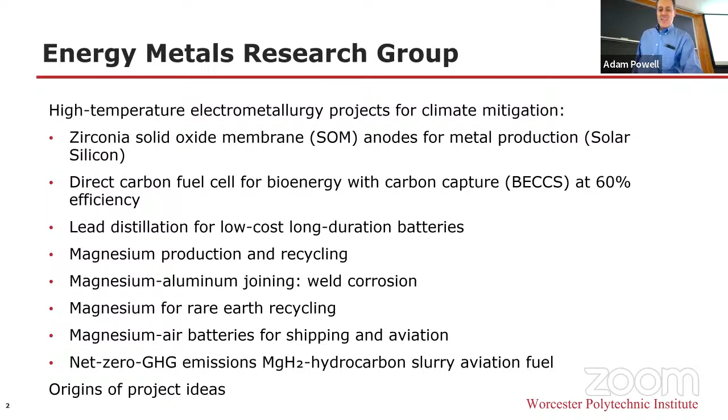It occurred to me as he presented it in the seminar a couple of weeks back that that's what we've been trying to do in our research group. So I'll talk about how the different influences in my life come together in our research group to create these different projects. To begin with, begin with a dedication.

Second is Uday Pal, who we will hear from in the spring. He became my PhD advisor after Professor Szekely passed away, and he has been a mentor ever since. His invention of the zirconia solid oxide membrane anode is part of our current research, as well as the signature technology of my startup company, Infinium.

So Donald Sadoway, we heard from recently. He also is a pioneering electrometallurgist, so I get many methods and ideas from the way that he's done research. I took graduate electrochemistry from him. He was on my thesis committee and has been a mentor since.

And finally, Tom Eager. Tom was the first person I met out of this group, in sophomore thermodynamics. He kept in touch over the years, and when I was founding a startup company, a co-founder and I came to him to ask a technical question, and we had lunch with him. He brought a check. He said, 'Here, I want to invest in your company.' I said, 'Wait a minute, we don't have a mechanism for doing that, but we'll figure it out.'

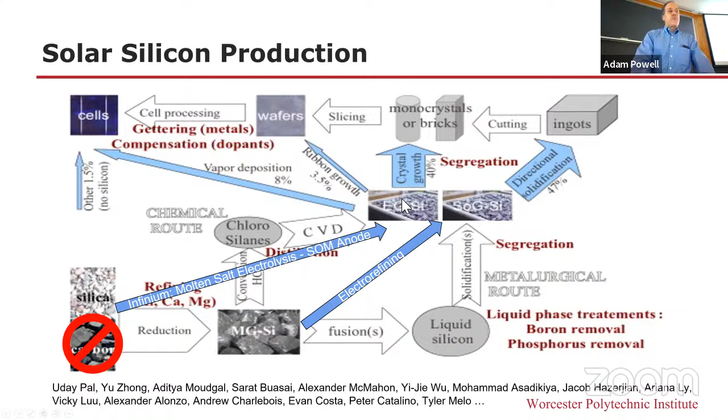The imperative to this is that silicon is a relatively small fraction of the cost, about 15% for the last 20 years. However, if we're going to continue to drive down the cost of solar energy to 18 cents, 15 cents, 10 cents and beyond, our current 4 cents per watt won't do it. And there's really no more room to reduce the cost of Siemens processed silicon.

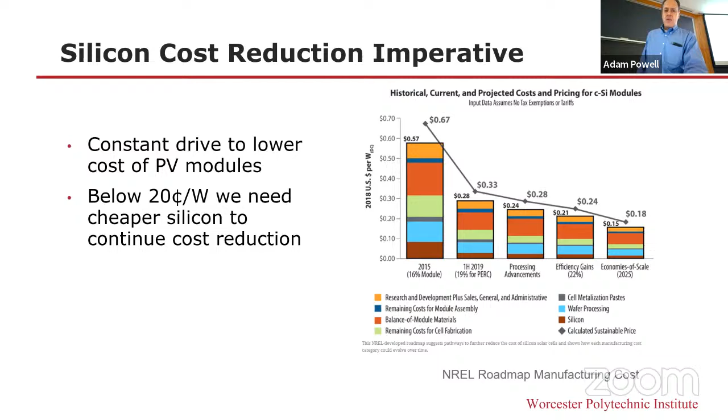So the idea is to dissolve silicon dioxide in a molten salt bath. In particular, the work of Uday Pal over the last 12 years or so has led to a new molten salt bath chemistry that was an order of magnitude better than everything else in 4 key metrics: solubility, conductivity, viscosity, and volatility. This allows you to dissolve silicon dioxide and use a zirconia, yttria stabilized zirconia solid oxide membrane anode.

This electrochemically pulls the oxygen from our molten salt electrolyte through a solid zirconia electrolyte into an inert anode, where it becomes oxygen gas. At the silicon side, we reduce—it's not really Si4 plus, it's more like an SiO4 4 minus, but it's silicon in the oxidation state of 4—gets reduced to silicon, which at this temperature is actually a decent conductor of electricity.

And we suppress dendrites by periodically switching one or more of the cathodes to an anodic state. So instead of depositing silicon, we're dissolving it away from the surface. This is a process I've been working on for quite a while. The big payoff is the energy reduction, 90% versus the Siemens process, let alone the much greater simplicity—a single step, or maybe 2 steps, from raw silica out of the ground to a usable silicon product.

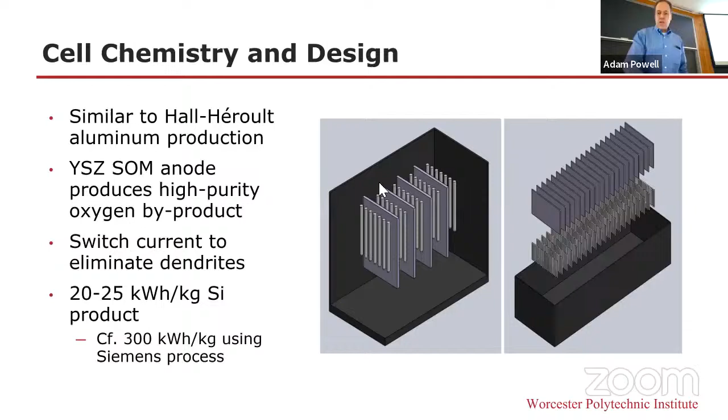This is what it would look like scaled up, making silicon slabs with the zirconia tubes, and a larger high current cell would look something like this. This is the energy balance, the thermal energy in versus the voltage stack energy.

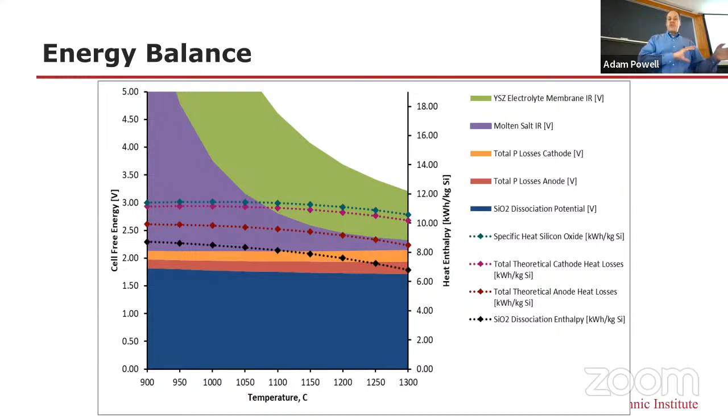Two different kinds of energy: the free energy and the thermal energy used to reduce the silica. A techno-economic model shows $1.74 per kilogram operating cost. This is considerably lower in operating costs and capital costs, but nonetheless a very high cost for a plant—so a big barrier to entry, but significantly lower than the lowest cost today of about $8 to $10 per kilogram, and as I said, with very little prospect of getting it lower because of the fundamentals of energy costs.

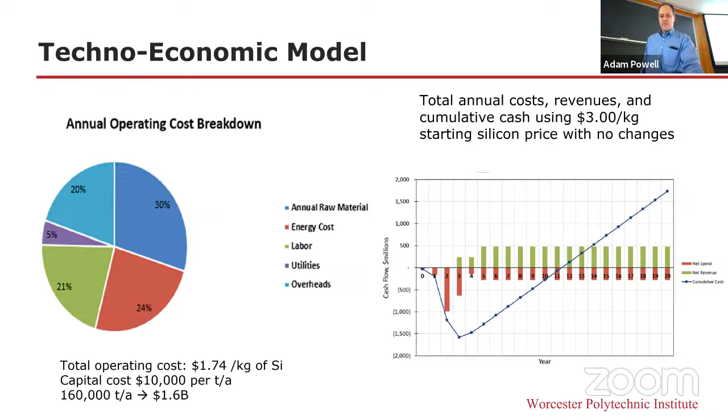Next project to talk about is the direct carbon fuel cell. The goal of this is that bioenergy with carbon capture, utilization and storage, has been a necessary part of all of the Intergovernmental Panel on Climate Change scenarios. But it's very inefficient, because you have to first take your biofuel and your air...

You have to do air separation and some gasification in order to feed it into a fuel cell, with an overall flow sheet of some 10 or 15 different unit operations, and an efficiency around 30 to 35%.

So about 8 years ago, Boyd Davis from Kingston Process Metallurgy came to me and said, 'Hey Adam, I have this idea. The coal industry is struggling with their emissions. What if we could just dissolve coal in liquid iron and then use a solid electrolyte and make electric power that way, just using air on the other side of the electrolyte?' So we took this idea.

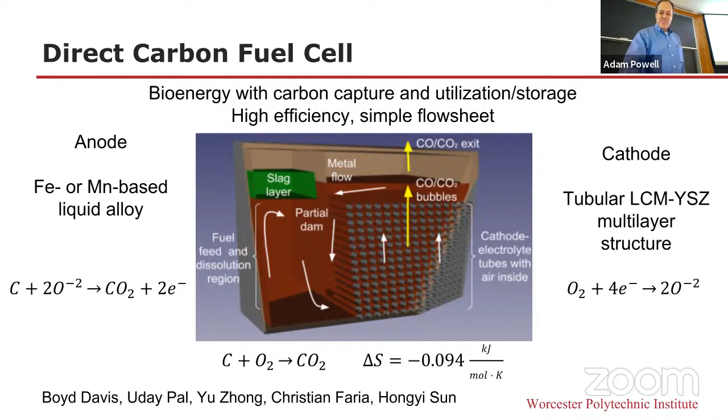We wrote a couple of proposals, neither of which succeeded. But then, while I was at Infinium, I came here and picked it up, working with Uday Pal and Yu Zhong. Christian Faria, a master's student, ran with it, as did Hongyi Sun -- and then Stephen Jasek, the second master's student.

Stephen Jasek was able to produce an electrode structure with just a 40 micron zirconia layer, finally able to realize some of the performance.

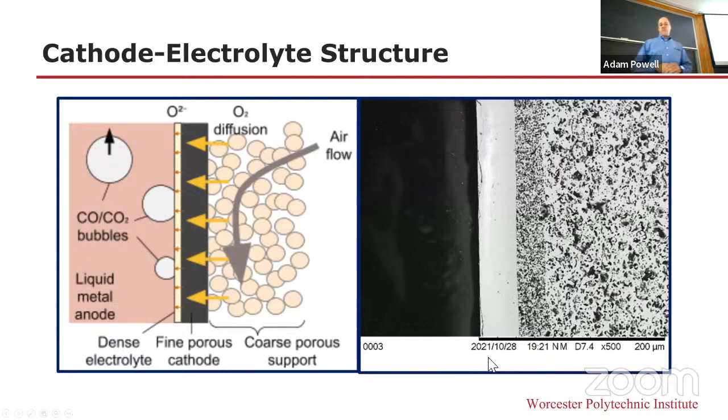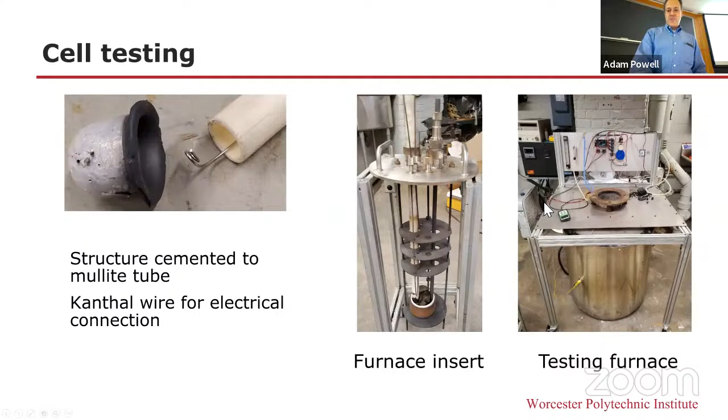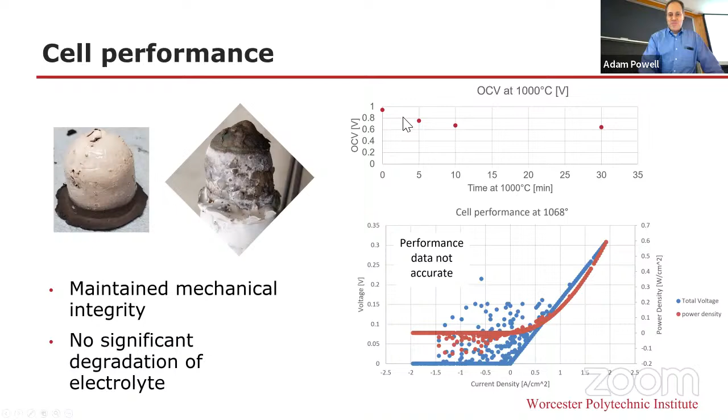He was able to measure an open circuit voltage starting at 1 volt, which declines slightly over time, maintaining mechanical integrity with no significant degradation of the electrolyte. We were not able to measure the current accurately, unfortunately, and then he finished -- we'll just leave it at that. But the open circuit voltage he measured is very close to the theoretical open circuit voltage.

Carbon is one of those things where for C plus O2 to CO2, the entropy is very close to zero, so the free energy and enthalpy are very close to each other. So we get a voltage versus current density prediction that looks like this: it declines as you increase current density because the resistance losses are proportional to current density. So you start from your theoretical value and decline from there.

With the final efficiency around 60%, this is around twice the efficiency of integrated gasification designs, whether with combined cycle or a fuel cell -- so quite a bit more efficient. Being able to demonstrate the high open circuit voltage indicates that we should be able to get that from this process. So this is an ongoing project.

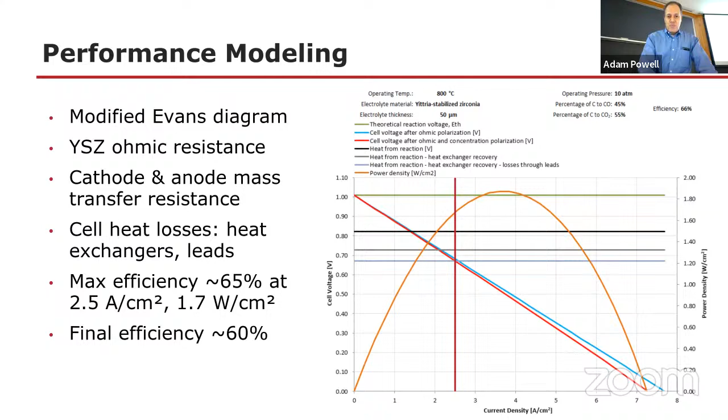The operating cost is quite a bit lower as a function of the efficiency, and the capital cost as well, because we have just basically two unit operations here. We take biochar, or charcoal, that's produced just by pyrolyzing your biofuel, your biomass. You can't really put that into any other fuel cell -- it's just carbon.

We think that we can use a lot less thermal energy per kilowatt hour of delivered energy because of that high efficiency. So this is an exciting project -- still in progress -- but again, it came from a collaborator.

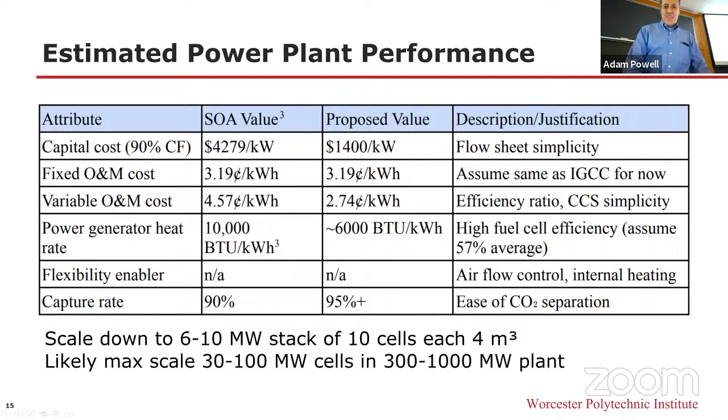The next several projects deal with magnesium and magnesium metal in particular. Why magnesium? Because it's very energy dense -- theoretical energy density of 7 kilowatt hours per kilogram, comparable to coal, but higher in kilowatt hours per unit volume than any of the fossil fuels, much better than ammonia and others we'll come back to later.

It's also very abundant. The oceans have 2 quadrillion tons, enough for 300,000 tons per human on the planet. If we took just one millionth of what's in the oceans, that's 300 kilograms per person -- enough energy to deliver one month's worth of electricity consumption for the average US citizen, that's household, industrial, commercial, everything. It also has very low toxicity.

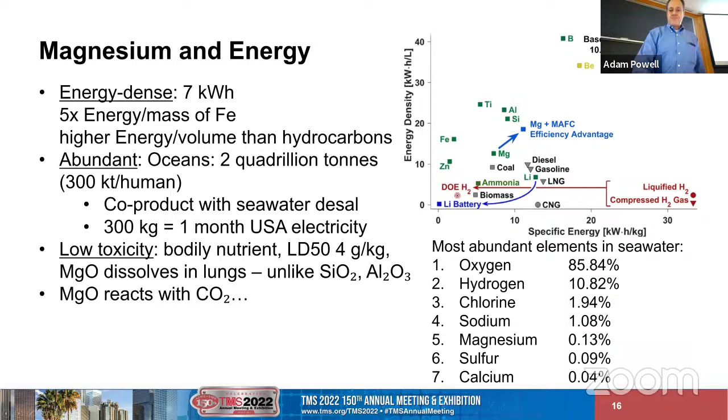We drink magnesium hydroxide for upset stomach, and we dump hundreds of tons of it per year on our roads to melt ice. And it reacts with CO2. I'll get back to that last point in a moment.

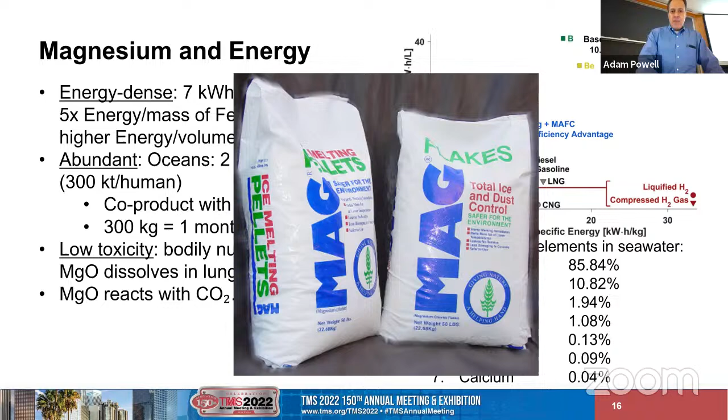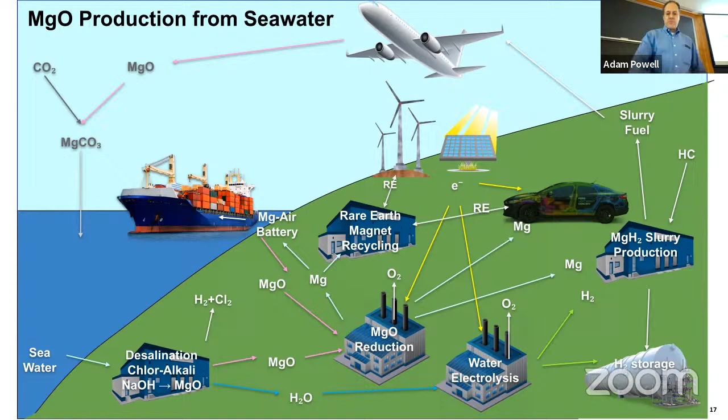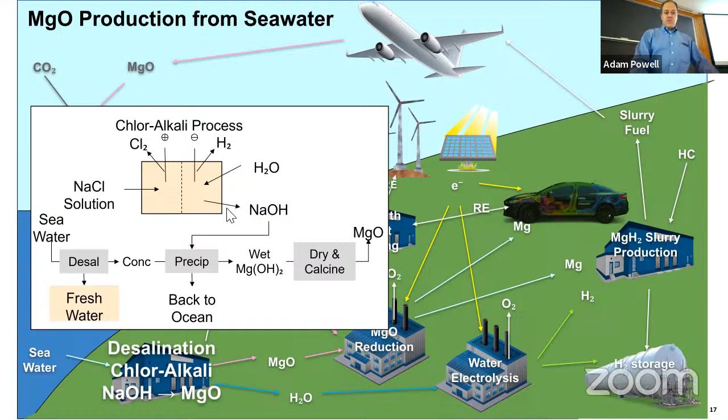First, we'll talk about what's called the magnesium clean energy ecosystem vision, and it begins with production from seawater. Every seawater desalination plant in the world that produces fresh water also has a concentrate byproduct that's mostly sodium, but the next most abundant cation is magnesium. A simple pH shift using, for example, sodium hydroxide from a chloralkali cell precipitates magnesium hydroxide, which you can dry and calcine. So with electricity and in principle zero direct emissions, you can go from this waste product to magnesium oxide.

You can then take that magnesium oxide and reduce it to metal through a process that's been influenced by Uday Pal, who began well before Infinium, looking at the use of a solid oxide membrane to make magnesium. The next important piece came from David Dussault, who was my first master's student when I was on the faculty at MIT. After leaving MIT, he developed this process for vapor compression distillation of water.

He got it to very similar efficiency to membrane separation of water, whether it's brackish water or seawater. That was the inspiration for this: what if we could do vapor compression distillation of magnesium? Well, what we could do then is use what's called a reactive metal cathode, starting with something like tin, and that enables us to do molten salt electrolysis in the same way that aluminum is made today.

This enables it because once we've reduced a bunch of magnesium oxide to metal, we basically take 90-10 tin-magnesium, increase the magnesium content, and produce oxygen gas, then put it into this distiller and get out pure magnesium metal, and tin with a little bit of magnesium left in it. So we get the pure magnesium metal out of that. This is the work of many undergraduate students, and now Zujian Tang has joined our group as a PhD student to work on this process.

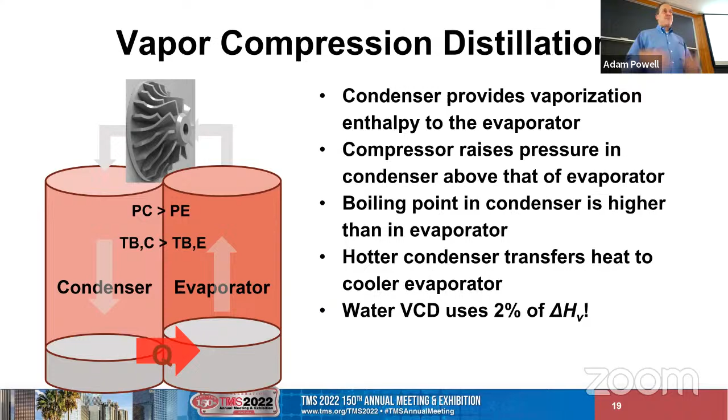David Dussault was able to demonstrate this for a water system with input energy that's only 2% of the vaporization enthalpy of water - the other 98% of the energy comes from the condenser. A really impressive system. So that was the motivation, the inspiration for doing this with magnesium.

It turned out compressing magnesium vapor is really hard, but the next best thing is something called a multiple effect thermal system distiller, and we came up with something called a gravity-driven multiple effect thermal system. This is what that looks like for a 100 kilogram per hour distiller.

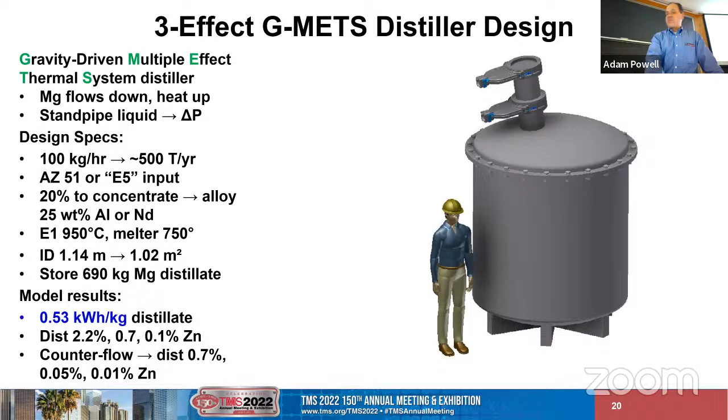On the inside, we feed scrap or our magnesium-tin alloy, and it flows from the melter to the first evaporator, where some of it evaporates and condenses up here, and what remains flows down to the second evaporator, where some of it evaporates and condenses. What remains flows down to the final evaporator, where some of it evaporates and condenses, and the remainder flows down to the concentrate accumulator.

We end up starting with something that's 50-50 by weight magnesium-tin, which is about 85-15 by mole, with more magnesium moles because of its molar mass, and we end up with something that's 90% tin by mass coming into the concentrate.

The energy from condensation provides the energy needed to evaporate in the next effect, and this energy from condensation here provides the energy needed to evaporate in this top effect. The pressure differences are created by these standpipes - the liquid height, your rho-G-H, gives you a higher pressure in evaporator 1 than above it, a higher pressure in evaporator 2 than above that, etc.

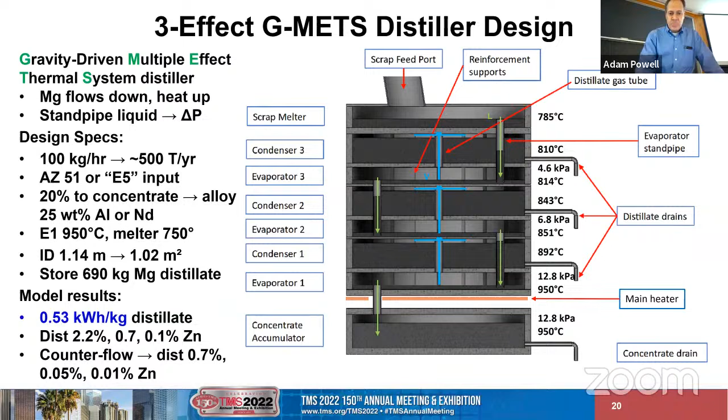The model shows this uses about one-third of the enthalpy of vaporization as the input energy. In practice, at small scale in the lab, we've been able to get 2 kWh per kilogram, which is just over the enthalpy, and about 60 to 80% less than the 5 to 7 kWh per kilogram used in industry today. So that's the basic how the technology works. You can scale it up just by making it wider, and so that's the process.

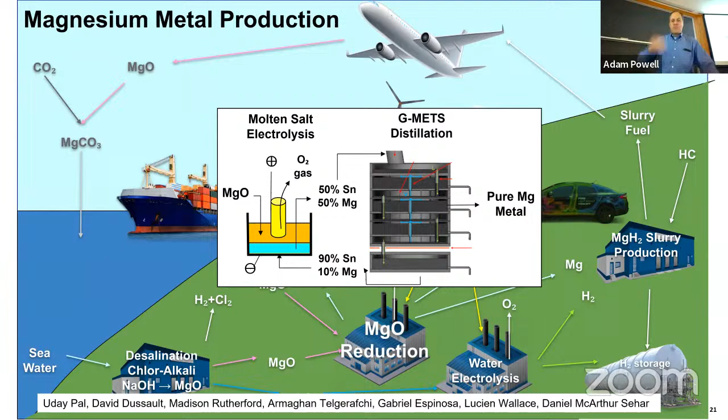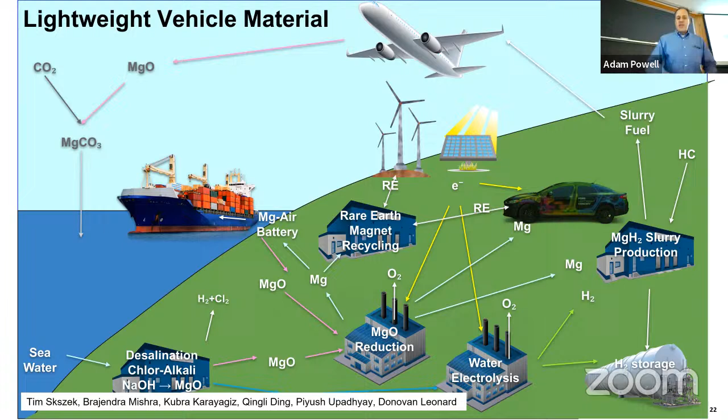Next, we can use this for many different applications. I mentioned that the metals have high performance. Magnesium has the best strength to weight and by far better stiffness to weight in parts than other metals, and is far more recyclable than composites.

So when Ford and Magna looked at what would the ideal multi-material lightweight vehicle be, they chose composites for some part of the substructure, but for the exterior and a lot of the structure, they chose magnesium because it's just much more expensive to make composites into the Class A surfaces.

The cycle time in the dies is very high. You need very large numbers of dies. It takes a half hour or more, whereas with magnesium, it's sheet stamping. It's seconds per part in a stamping die.

So one of the biggest challenges is joining and corrosion. As I was transitioning from Infinium to WPI, I talked with Tim Skszek at Magna, who said, we've got this new lightweight door that we're looking at, and instead of making it all aluminum, we want it to be aluminum magnesium. But we're concerned about corrosion at welds.

So I worked with, my next call was to Brajendra Mishra, who was a corrosion expert here. And then we put together a group, a postdoc and a grad student, and a group at Pacific Northwest National Lab and Oak Ridge National Lab. And we worked on understanding corrosion at welds.

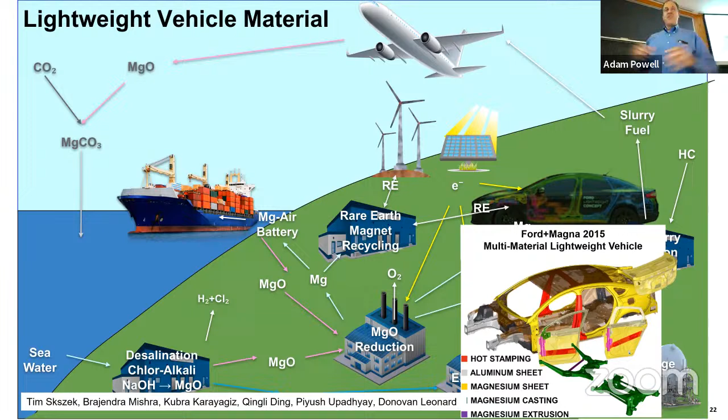So that project is wrapping up now, and we've shown that the friction stir welds have very little corrosion, and we think we understand why based on some of the structures that form and their electrical potential. We're finalizing more on that another time.

But the next project is on rare earth magnet recycling. This is something that has been around for years. A group with Toru Okabe at the University of Tokyo, another colleague, pioneered this, and Hitachi picked it up.

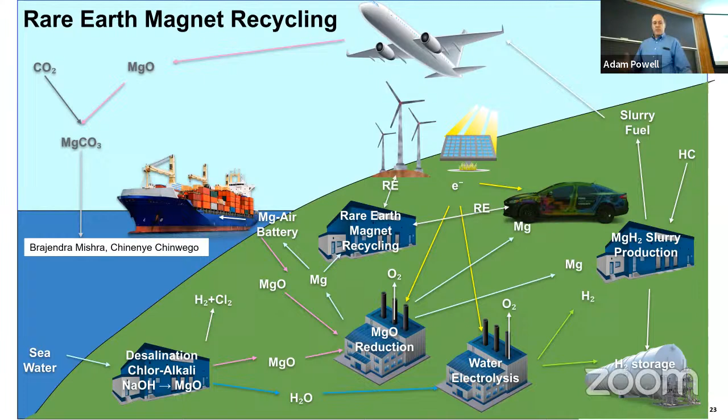But the issue here is that you can leach the rare earth metals out of rare earth magnets using liquid magnesium. However, then you have to use distillation to get the magnesium out. As I mentioned, that's a very inefficient process.

But if we use G-METS distillation, Chinenye Chinwego has shown that we can cut the energy use by about 60% and the cost by roughly in half using our distillation process. And to get the last bit of magnesium out, you have to go to vacuum distillation, but you've already removed about 80 or 85% of the magnesium much more efficiently than this conventional distillation process.

So she's in the process of starting a company and raising funds. So it's exciting. This may be the second spinoff, second to Solar Silicon.

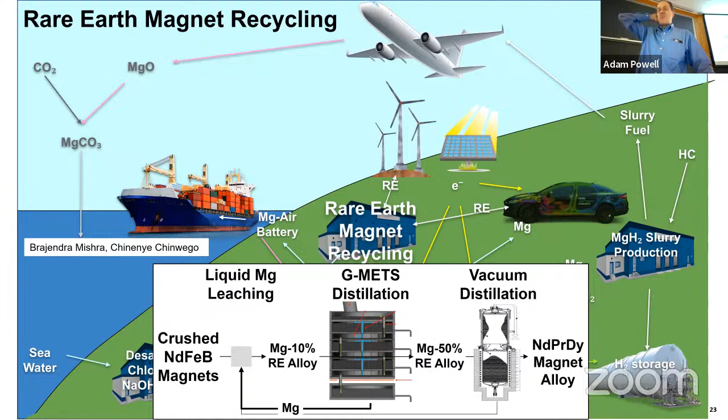Of Aditya and Mohammed Asadikia. And so next is a molten salt magnesium air battery. This is a large team. It's started by Hong Yi-sun and led now by Maya Shahabi in the group. I'd say that this is one of the two projects that really originated within the group.

The idea began with Hong Yi working with Christian Faria on the direct carbon fuel cell. And we thought, okay, what if we put some liquid magnesium on top of this, that as the CO2 came out, the magnesium would grab the oxygen and oxidize, and the carbon could go back into the liquid metal. So we'd have kind of a closed loop, carbon, CO2, back to carbon to CO2.

The magnesium would turn into magnesium oxide, and we could use its extraordinary energy density to maybe propel ships across the ocean. Well, that was a terrible idea because a lot of energy is lost in that CO2 plus magnesium to magnesium oxide plus carbon reaction. You only get about a third of the energy out of it at most.

So we went back to the drawing board and we said, okay, what about aqueous magnesium air batteries and fuel cells? Those have been around for a while. We looked at the literature and we said, this has some fundamental problems. You get an oxide film that passivates it and stops the reaction. We get hydrogen evolution. And so we're really not equipped in this group.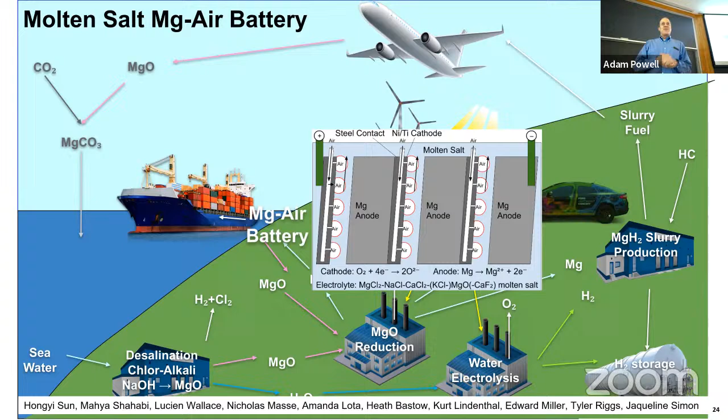And we came up with this idea, this crazy idea. You just put the magnesium, attach it to an electrode, and have an air electrode at the other side, and generate a voltage. Is that going to work? I had no idea. So we tried it, and not only did it work, but...

Skipped something, all right. Anyway, we were able to generate 1.9 volts, which is the highest voltage of a magnesium air battery to date by far. The next highest is 1.4 volts. So that was Hongyi Sun's work.

So the way it works, as I mentioned, we inject air into a porous cathode. It can be made of nickel, titanium, or stainless steel. And we found that for many hours in air with a molten salt, nickel is just fine. It doesn't oxidize, let alone dissolve.

It's pretty remarkable. As I mentioned, it generates a voltage through these combined reactions: oxygen to O2 minus, magnesium to Mg2 plus. These two dissolve in from the anode and the cathode into the molten salt. So your overall reaction is just the oxidation of magnesium to MgO.

The theoretical energy density is extraordinary. And the practical energy density is somewhere around 1,500 to 2,000 watt hours per kilogram, which is about 10 times lithium ion. Then the problem is you have to get this magnesium oxide out of the molten salt.

So a proposal for that was, let's try freezing it from one side and see if that works. And sure enough, the first time Mahya tried an experiment, it worked. We were able to see an immediate jump in the voltage due to a reduction of the magnesium oxide concentration and activity in the molten salt. So it was really exciting.

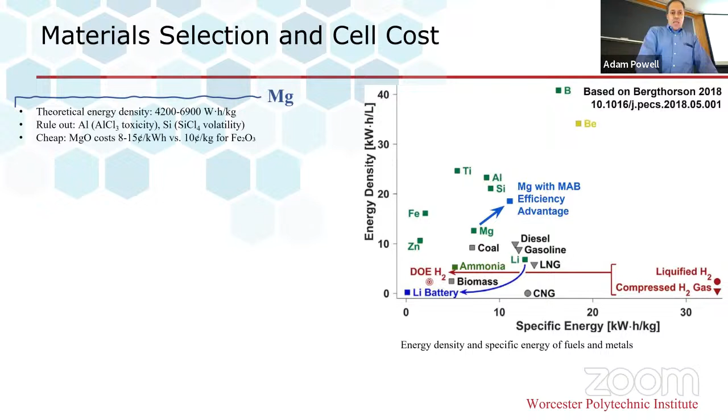Magnesium is a logical choice for these reasons. Theoretical density extraordinary. The chloride salt is basically dehydrated seawater plus carnallite, which is produced from the Dead Sea. So incredibly cheap. As mentioned, this open circuit voltage...

The cost estimates for this battery are somewhere around $3 to $5 per kilowatt hour. This is extremely low—comparable to pumped hydro, where you pump the water uphill and then capture its energy downhill. The limitations, as I mentioned, are high temperature and a low round trip efficiency.

So when you convert the magnesium oxide back to magnesium, you're putting in a certain amount of energy. You only get somewhere in the 40 to 60% of that energy back. So for round trip efficiency, lithium is much better, 90%. So if you can power something with lithium batteries, great.

But for a ship, you're only going to go a few hundred miles. If you want to go across the ocean, it's just the way to do it, I think—very low cost, very high energy density, and for potential electrification of ships and maybe aircraft.

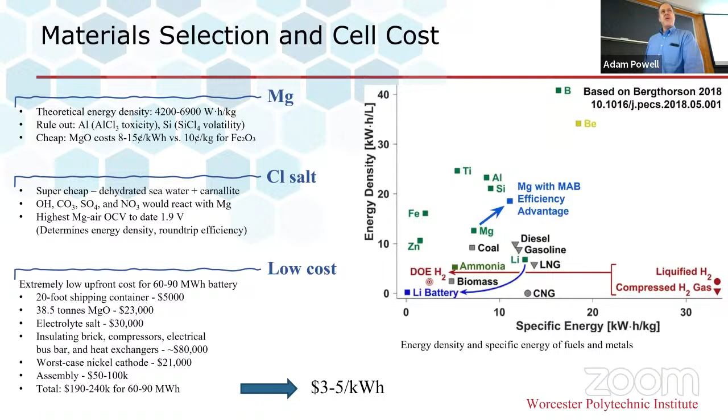If we look at the figures of merit, the round trip efficiency is considerably lower than lithium ion or Ambri, comparable to iron air of Form Energy, but with much better than ammonia, with not quite the energy density versus a tank full of a container for the ammonia tank. But ammonia is, of course, toxic and explosive, et cetera. Hydrogen as well, so much better energy density than hydrogen, better than ammonia, and very low cost as well.

Also not as high a discharge rate, but when you're trying to get across the ocean, you're talking about hundreds of hours for a discharge, maybe tens of hours for a long distance flight.

Our next step, we're working on demonstrating recharging in situ. It's an experiment this week. Well, not for recharging, but okay. Anyway...

The final project I'll talk about is a magnesium hydride zero emissions jet fuel. It's a project with Jagan Jayachandran, and this came up when Jagan and I both started in summer of 2018.

We were in new faculty orientation, and he was a combustion expert and talking about aviation. How do you clean up aviation? There are biofuels, but they displace crops and wooded areas for carbon capture by forests. They're not very efficient. Corn ethanol, for example, has the same life cycle emissions as gasoline. So it's...

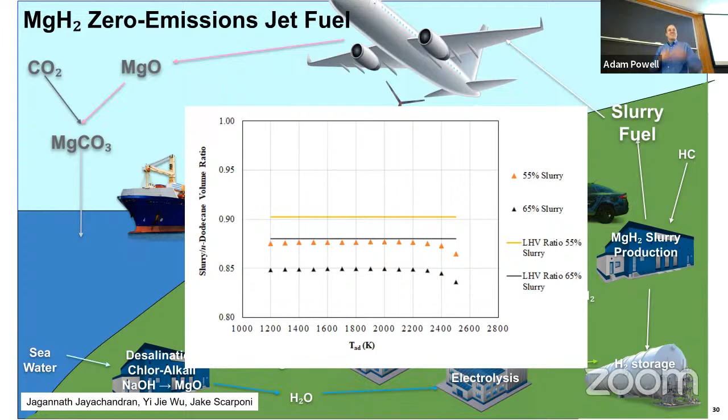So this showed us that for aircraft range, volume is more important than mass. Even though this fuel weighs so much more than conventional jet fuel, and dodecane is pretty much the single hydrocarbon, or the simple hydrocarbon, closest to jet fuel, you end up with 8% more range if you put the same fuel into a 787's fuel tanks.

And especially much more range than with ammonia or with hydrogen. Of course, you can't put those into the fuel tanks because they have to be either pressurized, which today's fuel tanks are not, or cryogenic, and same thing, you can't. So considerably better range than either ammonia or hydrogen for aviation.

Of course, the higher weight means you'll have a heavier landing gear and wings and other structures, so you'll probably lose that 6 to 8% better range and end up with comparable range. But there is no other proposed solution today for aviation with comparable range. Lithium batteries, of course, are way down here somewhere, so they're great for a couple hundred miles, but not for your transcontinental and intercontinental flights.

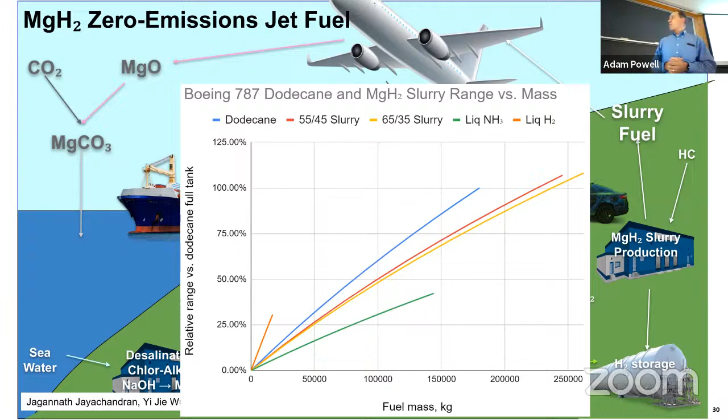So this is just a summary of the magnesium. It's safe, abundant, energy dense, and flexible for these applications.

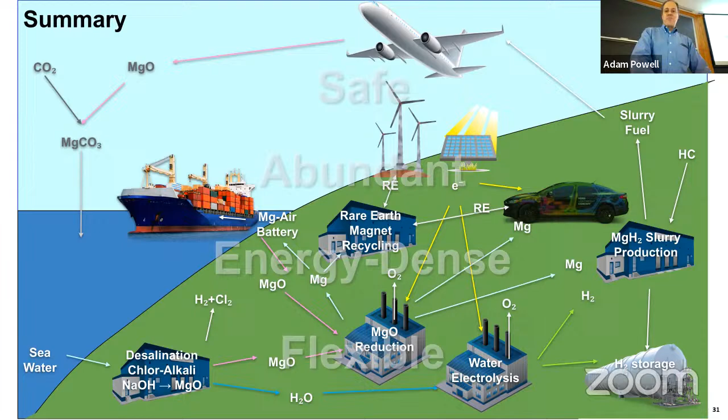I would summarize the talk by saying how do these high temperature electrometallurgy innovations come about? Number one, by networking. Most of the ideas came from outside, and we built on them in the group. Network and read. Brainstorm, focus on the key goals, like with the magnesium air battery. Just, how can we do this? This doesn't work, this doesn't work, this doesn't work. Let's try this thing. What if it does? And sure enough, it does.

Also a mission. One of the first things we did with this group, about a year in, with Aditya and Cuba the postdoc and others, was to put together our vision statement, our mission statement, and how we work, our core values.

An important thing about the mission is not just what we do, but what we don't do. So this spring I reverbalized this as a gigaton rule, that we don't do projects unless they have the potential for making significant progress toward 1 gigaton per year of greenhouse gas reduction. With that as our focus, you can see it still rules out too many projects, even with that consideration. We are working to innovate for climate impact.

Yes, very nice presentation. Thanks. Quick question, for the molten salt magnesium air batteries...

I see the sketch. Sounds like upon discharging, you form magnesium oxide on the bottom, right? That sort of makes it like primary battery operation. You may not be able to recharge. That's the question.

Yes, so there are two potential mechanisms for recharging. One of them is, as you said, just at end of life, dump out the molten salt, take the magnesium oxide, and send it back to the reduction plant. That's one option. Another option is instead of cooling the magnesium oxide side, we heat it so that it dissolves into the molten salt. If we can stay close to the solubility, I think we can get somewhere around 0.1 amps per square centimeter of reduction current density. So we're going to try to reverse the cell and go from dissolved magnesium oxide to magnesium metal.

This is not the ideal electrolyte for that. The solubility is only about half weight percent. We can potentially add fluorides to increase that, but we're trying to avoid it to keep the cost down. So we're going to try this and see how well it works with an oxygen producing electrode, we call it the positive electrode. That's what Sadoway said, right? It's not anode and cathode because they switch roles between charging and discharging. If that works, then we'll get up to something like 60% round trip efficiency. If not, we'll probably be closer to 40%.

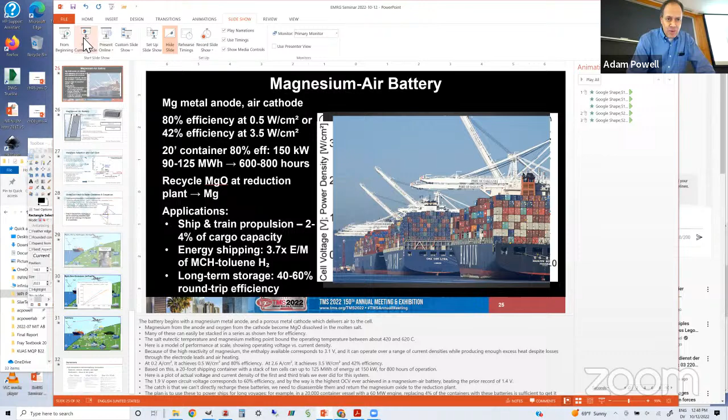Other questions? Yeah, this was the slide that was accidentally skipped. I'm not quite sure how, but yeah, that's the diagram here.

And the neat thing is we have this nice gap between the enthalpy and the free energy, so we can lose a lot of heat and still run very close to the maximum free energy. This is 3.1 volts, not 1 volt, so that's why we can potentially lose all of this heat. We did this after doing the carbon fuel cell models - like, wow, if this can work, that'd be pretty cool. All right, I'll take other questions.

Yeah, and here's what we achieved: 1.9 volts, which is close to the 2.3 theoretical. All right, maybe I'll just finish presenting this slide. So, no other...

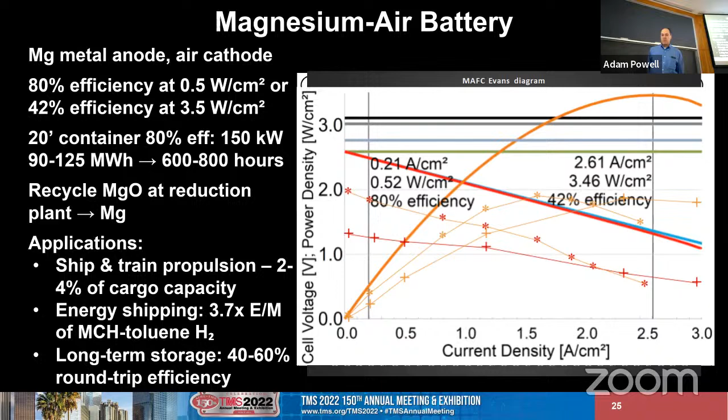If we can follow this model curve, then we can get to 80% efficiency. As it is, this is about 60% efficiency, and that would correspond to about 90 megawatt hours in a shipping container, compared with the best lithium-ion battery, which is 4 - so 20 times more energy. So if you were recharging your ship by swapping in these containers, you could go 20 times farther per container with this battery, if it works.

Yes, that was very impressive, and I wish I could think of a technical question.

But I think I might have understood some of your last slide, the brainstorming. I'm wondering, and that's one of the things I'm talking about writing about. It seems like there's a lot going on, a lot of borrowing, a little bit of original ideas. It might be fun to talk about that sometime, in the context of design.

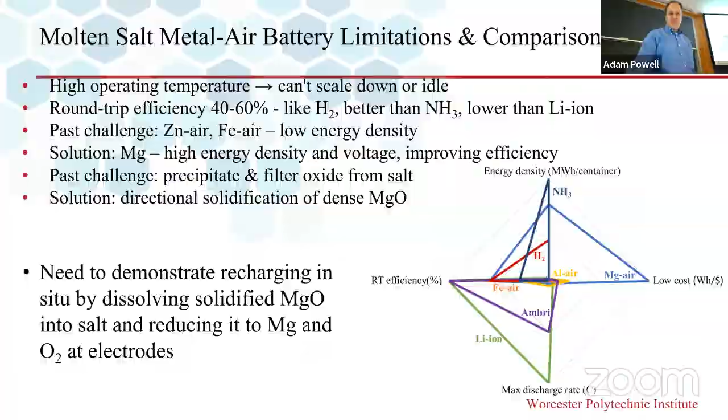Yeah, I can't say that we've come up with any kind of unique formal process for brainstorming, and there's all kinds of literature out there on different mind mapping and various things. But yeah, like I said, I think just network, read, and just struggle with it for a while, and you get to focus and get some ideas at least that will hopefully work.

So in your brainstorming, are you looking at functions that you're trying to achieve and maybe physical ways of doing it? Yes, basically. So for the magnesium air battery and the aviation fuel, these hydrocarbons are just so energy dense. What do we have that comes close? Yeah, at the high level, I guess.

But when you're figuring this out, is that also functionally based, but at a much lower level function than replacing? Yeah, good question. I guess so. In the aviation fuel, the functional requirement is really about generating high temperature, within the context of a jet engine. As mentioned, aluminum has more energy but it passivates more easily. Magnesium actually evaporates at these engine temperatures, so it can burn in the vapor phase, which is just neat.